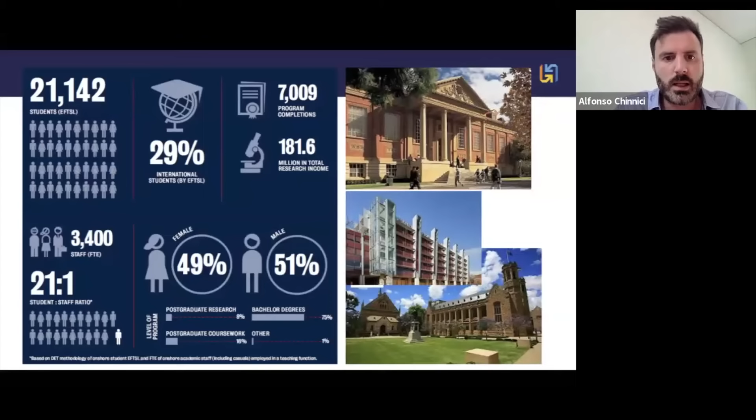Adelaide is the capital city of South Australia. For those who have never come, I really invite you to visit our city. It's quite beautiful, as I would say, being Italian, with a Mediterranean kind of climate, very similar to Napoli, and it's the fourth largest city in Australia. Our university this year celebrates its 150 year anniversary, with close to 20,000 students per year from many countries - Southeast Asia, Europe, Australia, US - so from all around the globe. It's quite an international city and university.

Most of my work sits within the Center for Energy Technology, which we call CET. It's a very multidisciplinary center, focused on net zero industry and hydrogen. Most of our work starts from fundamentals but has a lot of application. In fact, we have an industry advisory board that we report to, and the center has evolved to become a major engine for powering different cooperative research centers in Australia.

Today I'll talk a little more in detail about the HILT CRC. As you can see from our KPIs, besides traditional academic KPIs, we have many industry-type KPIs, particularly in the commercial technology platform. We just hosted, finishing yesterday, a major industrial high temperature forum which we host every 2 years - I invite you to come to High Temp 5 in 2026. In alternating years, we have a conference on hydrogen production, called HIPT, which has grown to about 300 attendees, running in alternating years from High Temp. It will be next year in Adelaide.

I've been talking a little about HILT CRC, which stands for Heavy Industry Low Carbon Transition, and CRC in Australia stands for Cooperative Research Centre. In the history of CRCs, HILT is one of the largest in terms of both number of partners and direct cash funding. It's a 10 year program, roughly a 240 million Australian dollar program, and it's industry managed.

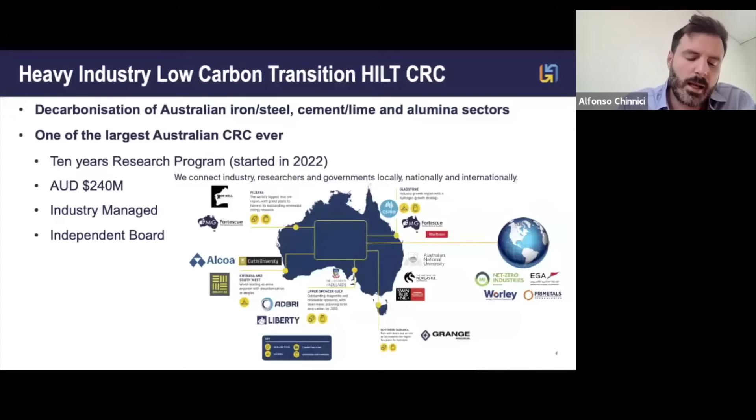We have a strong connection with European research centers and universities, such as University of Naples, but also DLR in Germany, and up to the US with Arizona State University. So it's quite a global center in that regard.

Now, I've decided to give you a snapshot of the work on industrial decarbonization only. Of course, we operate at 360 degrees—we look at decarbonization, transport, aviation fuel, and so on. But for today, I'll just focus on the hard-to-abate sector.

The reason why the center is very focused on decarbonizing heavy industry, you could probably get a flavor of why from these IEA plots. It basically tells you that while the world is decarbonizing, and doing a pretty decent job in sectors such as electricity, building, or transport, the industry—particularly high temperature industrial processes—is much harder to decarbonize. As decarbonization goes along over the years, the share of CO2 equivalent allocated to industry gradually grows, to a point that by 2050 the IEA is basically telling us that the majority of the share will only come from heavy industry.

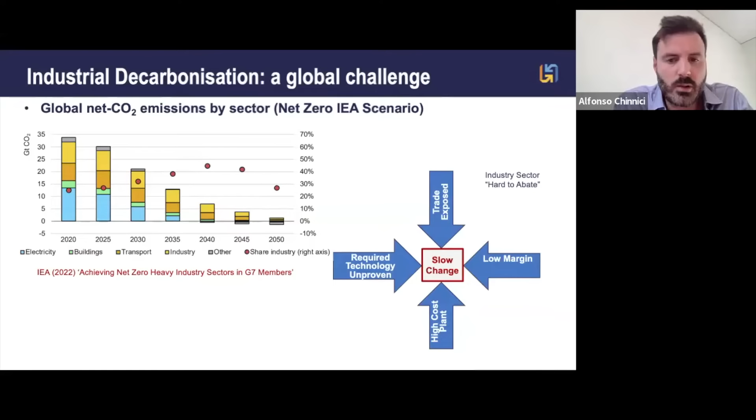Now, of course, this is a challenge, but on the other hand, if you think about the cost of decarbonizing some big commodities like steel or cement or plastic, with current existing established greener pathways, cost is a problem—a major concern from the commodity aspect. You see that we are looking at up to 20, 100, or even 50% increase on these three commodity prices.

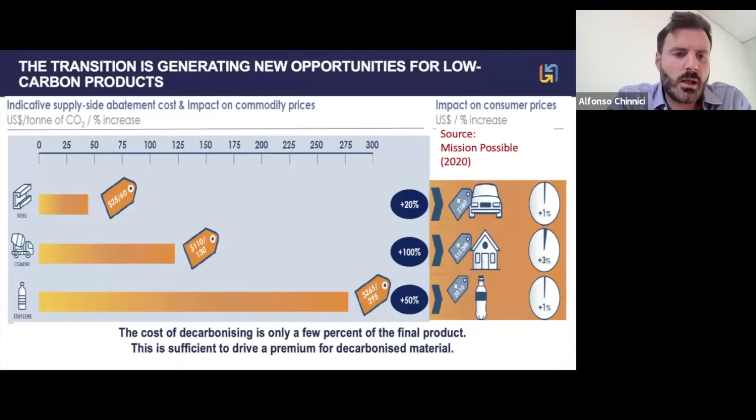But when it comes to the end product—imagine a car or a house or a plastic bottle—the actual potential impact on the final price is quite minor. Minor to a point that it's sufficiently small enough to potentially drive a premium for production of decarbonized materials. Many early players started to invest in green products just because of the potential impact of utilizing a green premium or other policy mechanisms to fast-track the transition. So this kind of justifies further investment, from very fundamental R&D up to actual commercial transition.

Now, in terms of additional challenges to high temperature processes for heavy industry, I believe most of you are familiar with this—I've just listed some key appliances in iron, steel, cement, and alumina. These are all reactors, high temperature, typically above 1,000 degrees for blast furnaces; we're also talking about 1,600 Celsius. The reactor scale is high too—on average we're looking at 100 megawatts.

Now, one of the challenges with current appliances—imagine a blast furnace—is that the lifetime of this reactor technology is around 20 to 30 years. This brings a real urgency to decarbonize and upscale the new emerging pathways to decarbonize this technology.

The reason being, for example, if today we decide to rely on a blast furnace rather than switching to, for example, a DRI process, this will lock in the blast furnace utilization for that particular process for at least another 20 years, given that this is a very high capital intensive relining process. So if we do not provide an alternative to blast furnaces or other types of appliances, we are looking at locking in for another cycle or lifetime.

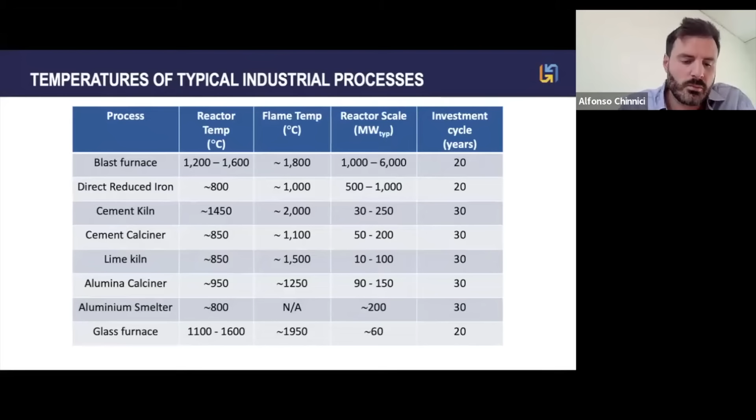So we are really pushing out the target that we have for net zero by 2050. Of course, there are many alternative pathways to net zero for this industry. Combustion and hydrogen and derivatives can, in my view, play a key role. Of course, there are other competitors, but also complementary pathways such as electrification or even using solar thermal high temperature processes.

To some extent, particularly for cement, where CO2 comes from limestone, it will make sense to use carbon capture, and depending on availability, biomass can also play a role. Of course, all of these pathways have different stages of development in terms of TRL, and different opportunities and challenges, but one common factor is relatively high cost.

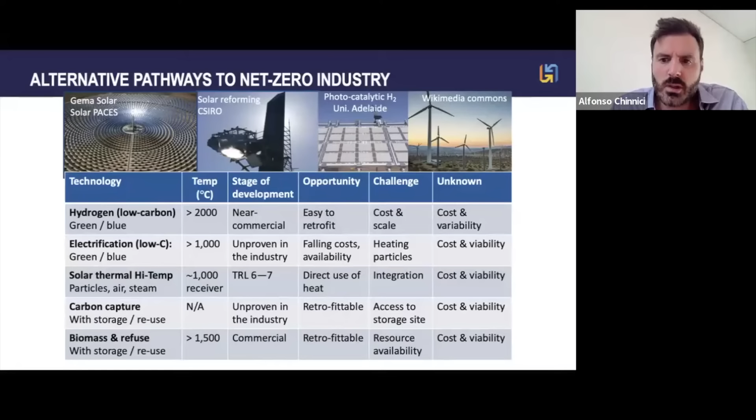For example, hydrogen, especially green electrolytic hydrogen, is still costly today for some of our partners to really say, yes, let's make a switch to hydrogen today.

Now, when it comes to net zero, another thing we really invest in at the center is around circularity. In order to really tackle the challenge of decarbonizing heavy industry, we can't think of our process in isolation. This is just a layout of circularity coming from the three major commodities that we have in HILT.

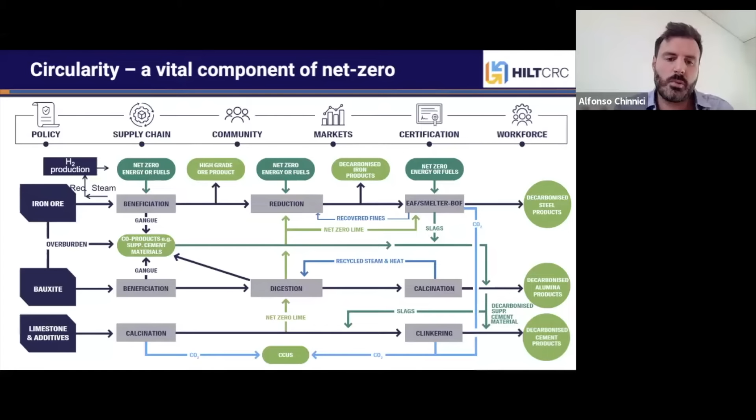Just to give you an idea, lime is a cross commodity, used for many processes in the iron ore sector but also in the bauxite alumina sector. So decarbonizing one will also unlock a transformational opportunity for these other sectors. Circularity will play a major role beyond just the technical combustion challenge or opportunity, in order to really tackle the problem of net zero heavy industry.

Now, as I say, we are very active in the hydrogen technology aspect, across all the supply chain, from production, techno-economics of storage and transport, down to the utilization aspect. Today I will try to focus a little bit more on the combustion aspect, given that this is a combustion lecture.

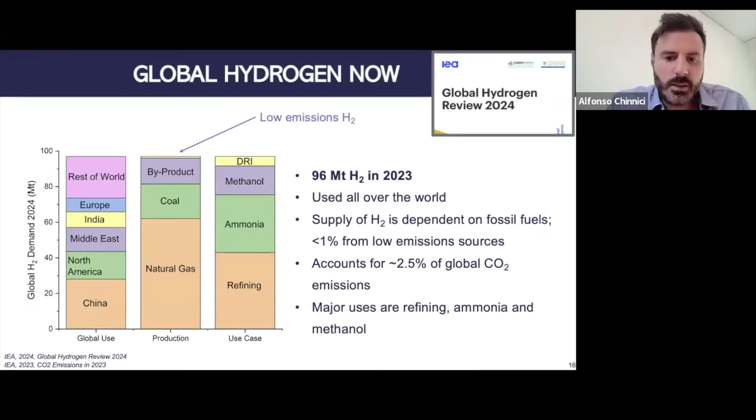But just to set the framework here, if you look at the IEA trend for low emission or low carbon hydrogen, we produced roughly 100 million tons of hydrogen last year, but less than 1% comes from low emission sources. On the other hand, given that the majority of hydrogen comes from oil and gas refining, this is actually a dirty process at the moment, accounting for close to 3% of global CO2 emissions.

Now, when it comes to the IEA pathway to reach net zero, the NZE scenario, we are really far away from where we should be, in the sense that currently we only produce 1 million tons per year globally of this low emission hydrogen. What we really should produce is close to 50 million tons per year by not even 6 years from now. So it's really a challenging task, and this gets even higher, close to 65 million tons per year, when you look at 2030.

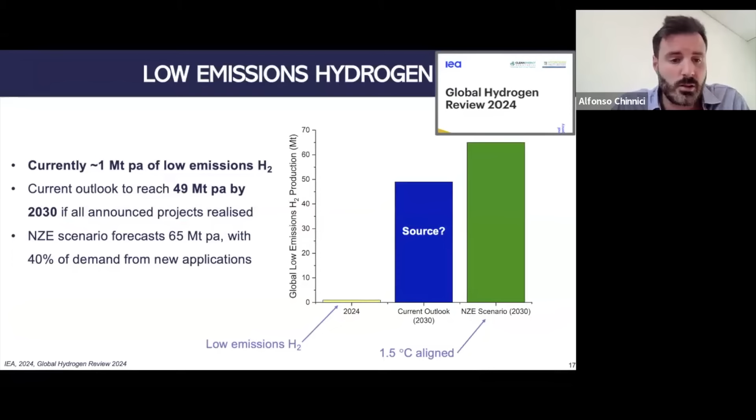So there are different sources, different technologies being proposed. Of course, the electrolyzer is the key predominant one around the world, but currently it's not being scaled up fast enough, and that's mostly because of the high levelized cost of electricity today for many countries around the world.

Now, at the University of Adelaide, within our center, we are pretty focused on three different alternative production routes beside the electrolyzer. Of course, we do quite a lot of work in electrolyzers, but we are also focused on alternative pathways. One is what we call the ultra green photocatalysis route, which some of my colleagues in the chemistry department have really done a great job fast tracking in the last couple of years, up to TRL 5, and they've been backed by many investors.

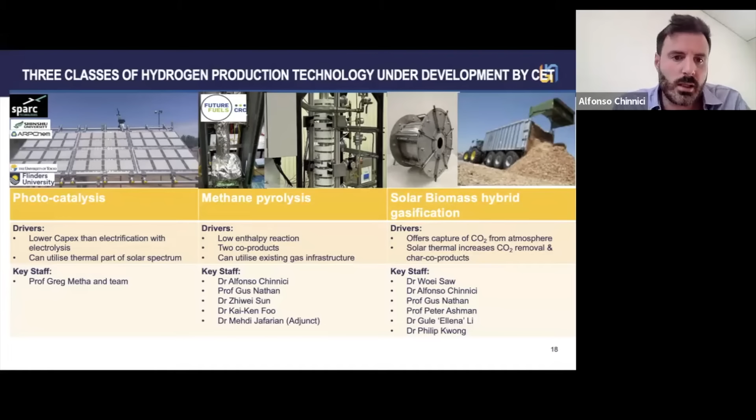While my group has been focused more on the thermochemistry side, so we are quite interested in looking at methane or biogas pyrolysis, as well as using alternative sources such as solar thermal energy to process biomass to produce green syngas. Given the short time today, I would just give you some highlights on why we are interested in methane pyrolysis.

Now, when you look at the basic thermodynamics of pyrolysis and compare that with established electrolysis routes, it makes a lot of sense from a delta H perspective, because it's a quarter of the energy requirement compared to electrolyzers. And also, you don't need water, which is another key constraint in many countries around the world for electrolyzers.

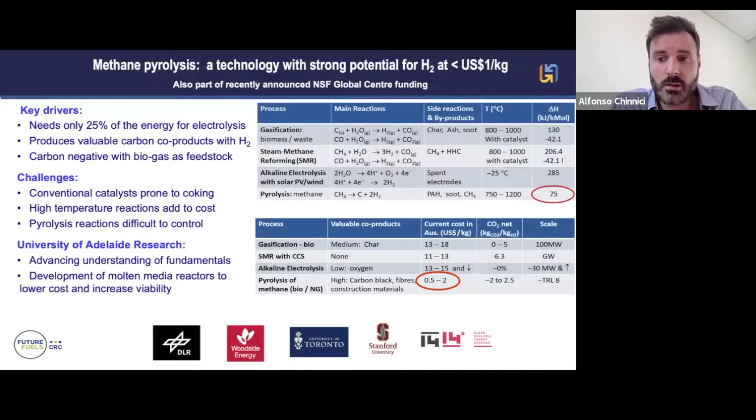And also our estimates for current production costs in Australia, but we have many partners around the world that back up this trend, for example in the US, putting this technology at potentially less than $1 per kg of hydrogen with current established production technology.

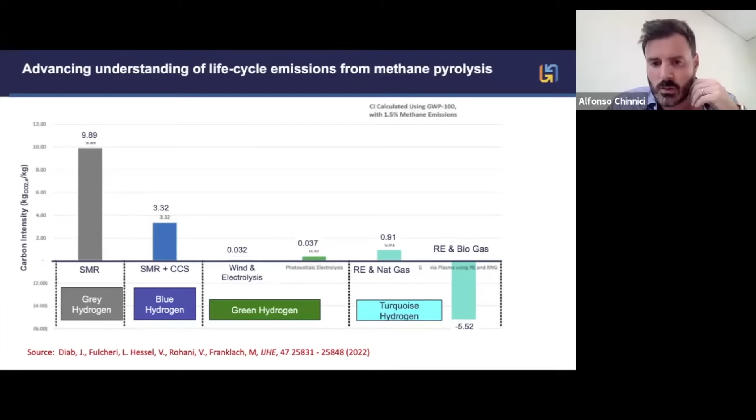Another key interesting point around what we call turquoise hydrogen is that the electricity or energy source that goes into the reactor to split the methane or biogas, and the source of the methane, is really critical for the CO2 equivalent estimates. In terms of carbon intensity, we could potentially produce turquoise hydrogen with negative emissions if coupled with renewable electricity and biogas, or very minimal carbon intensity if we use current natural gas, and this is after including fugitive emissions from natural gas operations. So especially in countries like Australia, where gas is quite cheap and available, it could make a lot of sense.

Now, we are not trying to reinvent the wheel. There are many companies we collaborate with around the world that have already achieved quite advanced stages, the most advanced being Monolith in the US, which has already reached commercial stage. They use a thermal plasma as their reactor technology. There are a couple of other technology providers, one being Australian, that instead use a fluidized bed catalyst and also microwave.

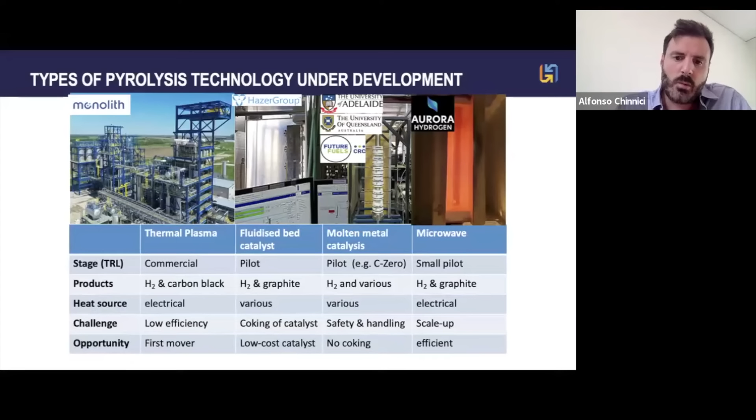We started using tin, but there are also other types of metals that can be utilized. We bubble gas such as methane or biogas into our bubbling column, and we use resistive heating to produce the heat and split the methane or natural gas at moderate temperature. Basically the carbon floats at the top, while we can recover the unreacted methane or the hydrogen product also from the top.

This has a lot of potential advantages because we don't have what we call a sacrificial catalyst. Also, we can take advantage of high heat and mass transfer coming from bubble reactors, and we can tune the residence time of this device to tailor the particular carbon product, which also has a strong impact on the techno-economics.

We have done quite a lot of work and modeling of this device, and from a chemical engineering perspective we have identified that how we produce the bubble is quite critical. Ideally we would like to produce micro bubbles in order to maximize surface area, because the reaction is mostly dominated at the interface. Through the use of Aspen process modeling, we looked at different configurations and were able to identify conditions where we can obtain high conversion of the methane at relatively low temperature, less than 1000 degrees, which is a step change compared to some of the other processes I showed before.

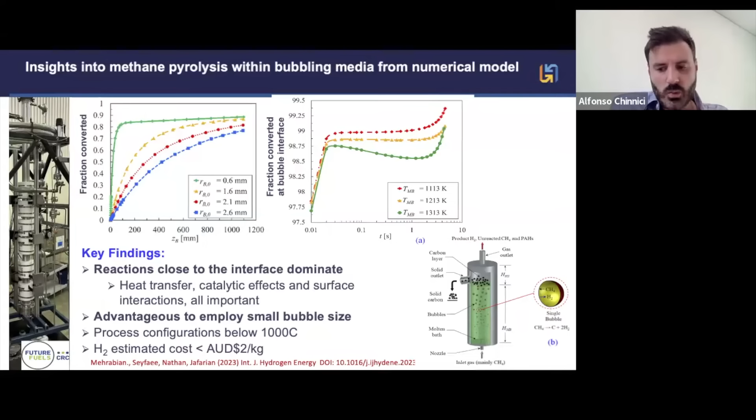In terms of cost estimate, we could potentially reach less than $2 Australian dollars per kg, which roughly equates to $1 US per kg. So we are further investing in this technology with our partners, but we welcome any collaboration from other research groups around the world on this topic, particularly on the kinetic aspect, which is non-trivial.

Now, of course, if we have availability of hydrogen at relatively low cost, it makes a lot of sense to utilize hydrogen as a fuel or as a reductant to replace some traditional fossil fuels. When it comes to combustion, although hydrogen looks like a simple fuel compared to some traditional hydrocarbons, it brings some challenges.

Some are listed here: there is a chance of higher NOx than with traditional hydrocarbons, due to a higher adiabatic flame temperature. For processes requiring radiation, like rotary kilns in cement and lime production, this is a major problem because hydrogen has low radiant heat, much lower than hydrocarbons which produce soot and hence radiation. Also, hydrogen has a low visibility flame, which brings a safety aspect into the mix.

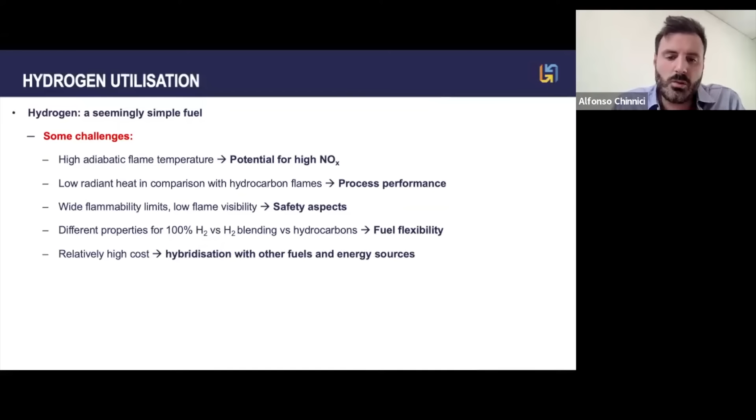If you're looking from a blending perspective, this requires technology that can provide fuel flexibility. And back to my initial point around high cost, we should also start looking at alternative combustion technology, ideally hybrid combustion technology, where we use hydrogen only when it's cheap enough or when there is available stored hydrogen from, let's say, a renewable grid that gets stored and is cheap enough to be used, while in other cases we use more traditional energy source.

So in terms of the more fundamental aspect of hydrogen, I'll try to go quick through this since most of you are familiar. Of course, we are interested in hydrogen given that it does not produce CO2 when it burns. But when you look, for example, against methane, the chemical and physical properties are quite different. A key one is the energy density of hydrogen.

Particularly on a volume basis, hydrogen is a third less energy dense than methane. This is a major problem, because imagine you want to push through your burner the exact same amount of heat — this means three times more volume flow of hydrogen compared to gas to keep the same heat. So you can imagine the challenge in terms of flow rate, velocity, and how we readjust process performance.

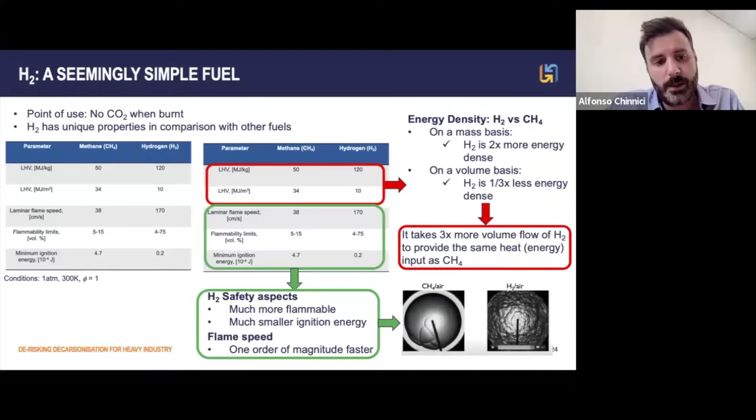And of course, when it comes to laminar flame speed, which is a critical parameter for safety but also critical for how we design our burners today, we know that hydrogen's laminar flame speed is an order of magnitude higher, as you can see from this video, compared to methane. This really requires reconsideration of many current burners, and also brings challenges when you look at retrofitting existing appliances, which ideally would be the first stop for our partners when it comes to low-risk changes.

Now, another interesting plot I always like to spend a few words on is around blending of hydrogen with methane. If you look at the last 5 years, especially at the fundamental level, there are hundreds and hundreds of papers around blending. Is this the right way to decarbonize or to reach net zero? The short answer is no.

If you look from a combustion aspect only, this plot shows on the x-axis the blend of hydrogen and methane by volume, and on the y-axis the actual CO2 reduction. Because hydrogen is a third less energy dense than methane, you need to reach at least 80% by volume of hydrogen to only have half of the energy input coming from the blend. So in other words, when we look at blending for net zero, we should only look at the extreme sides of this plot, 80% and above, which means it's probably best for us as a combustion community to focus on regenerative burners that cope with 100% hydrogen firing, rather than looking at the first step of blending.

Of course, there are other aspects of the supply chain where it does make sense to look at blending 5, 10, or 20% by volume of hydrogen, and this comes more from the gas producer and pipeline operator side, where ideally you can pump a little hydrogen into the natural gas, not really to decarbonize in my view, but rather to produce momentum in the supply chain in terms of investing in upscaling infrastructure, and also to really understand the whole hydrogen market better. But from a very simple combustion perspective, it doesn't make much sense to look at low hydrogen blending for net zero.

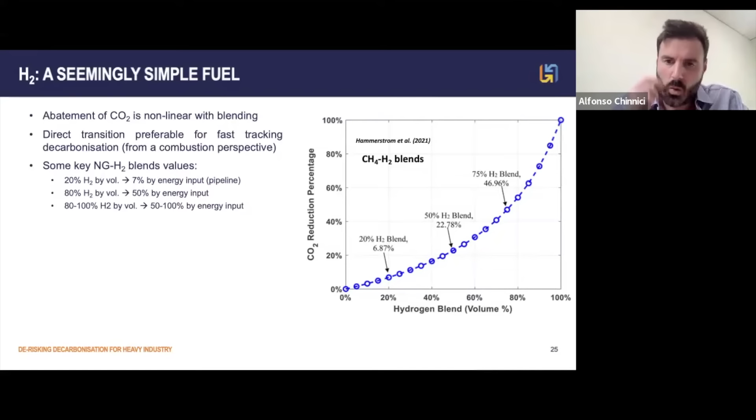Now, to this extent, in our group we are pretty much working hand in hand with many end users. And again, we are lucky enough that our end users are very kind to provide plant data and work hand in hand with our students to really try to tackle this big challenge for their appliances.

And particularly with the partner, we are looking at how we can decarbonize with hydrogen — hot gas generators for, I don't know, pelletization, rotary kiln for cement lime, but also reheating steel. All of these appliances have some common challenges, for example NOx, but others, for example kilns, most specifically around the radiation profile and radiation fraction, which is challenging with hydrogen. And for reheating steel, you have additional challenges or constraints where you also need to identify combustion technology that can provide quite uniform heating and absence of hotspots, to avoid reducing the performance of the rolling and the quality of your steel.

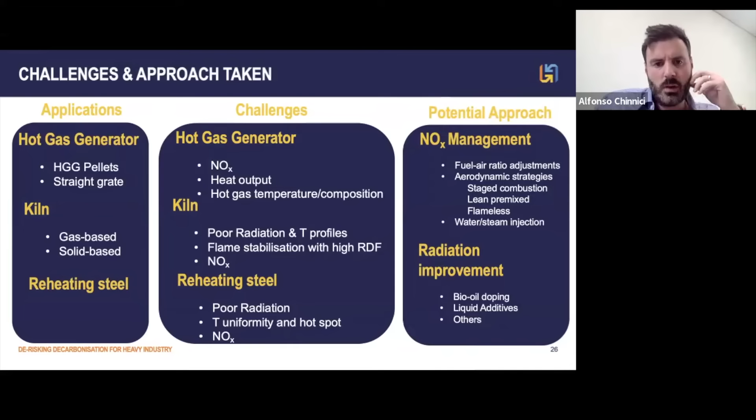On the right side of this slide, you can see some of the ideas or technology we are working on with our partners around both NOx management and radiation improvement. Today I will give you some snapshots of key outcomes on that.

So just as a start, as an exemplar technology, we are working very closely with the largest pellets producer in the Oceania region. It's a magnetite, pelletized-based producer.

They use a quite unique way to produce pellets, and they have a series of hot gas generators that today are powered by full-on natural gas. They have a series of roughly 7-8 megawatt register type burners to produce the hot air or hot flue gas needed for the induration step down the track.

So we started first by looking at understanding what's the challenge or constraint of utilizing the existing burner when switched to natural gas with a high hydrogen intake in the blend, or ideally 100% hydrogen. We also looked at a series of strategies - do we need to optimize the mass airflow rate, or rather the equivalence ratio? This started initially as a trivial question, but as we show you shortly, it is not.

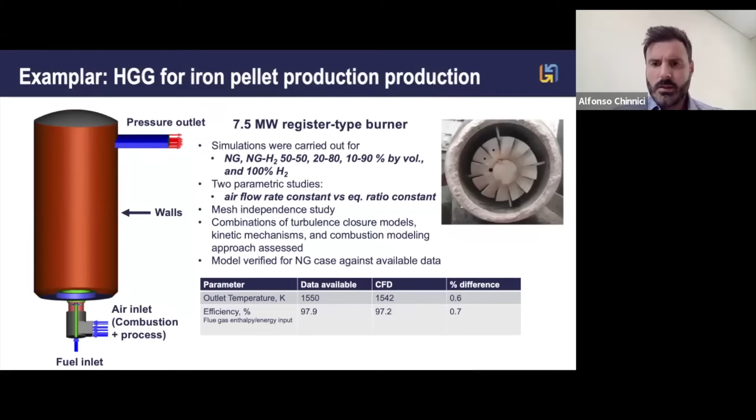So we have developed a 3D CFD model of their actual commercial plant and burner. We have verified the model through some of our existing pilot plant data that has been provided. Of course, we have done a more in-depth verification of our model training using a lab scale data set that we have in-house.

Just to give you a flavor of some of the results, you see on the left side some of the temperature contours and the OH profile within this hot gas generator when we gradually switch from gas to hydrogen, and also what's the impact of the hydrogen intake on components of the burner. You see that initially this flame, what we call flower-like type, is relatively short compared to the volume of the hot gas generator.

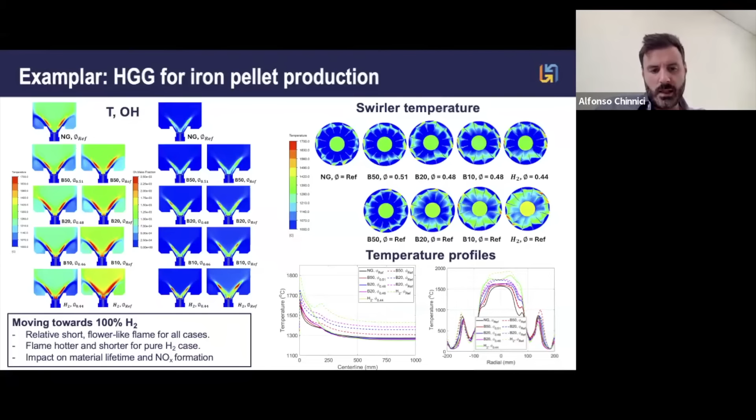The flame dynamics stays somehow the same when you move to really high intake of hydrogen, including 100% hydrogen. But you see that when you gradually increase the hydrogen, you start having a flame that is much shorter and much hotter, which, as you can see from the temperature here, has a strong impact both on material lifetime and, as I'll show you shortly, on NOx formation as well.

Now, as I said before, you can imagine that much hotter flame means much hotter NOx, much higher NOx emission. There's two aspects here. Firstly, one thing I'd like to draw your attention to is how policy everywhere in the EU, US, and also Australia really works against hydrogen utilization today.

Today we are bound to report commercially NOx level as milligram per cubic meter of NOx at dry condition, typically normalized at some oxygen level. But this is not really the right thing to do when you start having hydrogen in the mix, because you actually in a biased way bring the limits for hydrogen lower. So actually the right thing to do would be to report this as ENOx, as milligram per megajoule.

A few policy mechanisms have been put in place in Australia to change the standards today. This has already been put in place for Type A appliances, and the Type B new policy mechanism on how we report NOx when hydrogen is in the mix will be coming in the next few years in Australia.

But back to what actually happened in our hot gas generator - you see that keeping the total mass airflow rate constant does help in keeping the NOx low enough even for really high hydrogen intake, while readjusting the equivalence ratio every time we change the fuel has a strong impact on NOx. The bottom line of this exercise is that the current burner does not cope well with 100% hydrogen firing - it has really high NOx emission, much higher than existing operation, and really high compared to current limits.

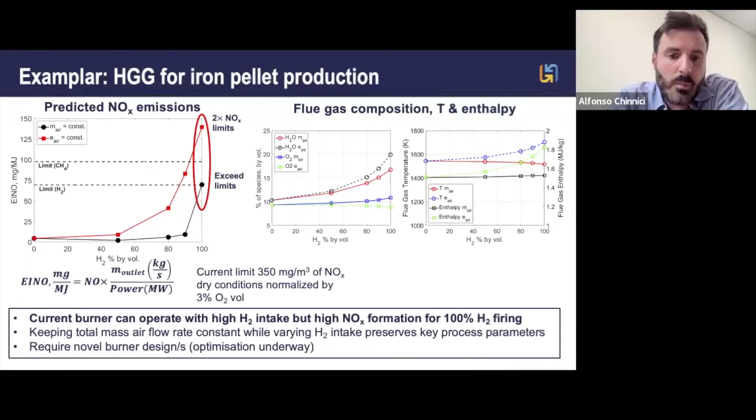This is non-trivial, but again we have identified that maintaining the mass flow rate constant in our hot gas generator while changing the fuel really does help in preserving both the flue gas temperature and the flue gas enthalpy similar to current gas operation, so that we anticipate only a minor impact on the downstream induration process. But of course we do need to re-engineer the burner, and we are doing that quite substantially.

Unfortunately, I'm not able to show you the actual details of how we do it, because of IP commercialization. But just to give you a flavor, we have tried to basically design an ultra low NOx burner suitable for hot gas generators with 100% hydrogen firing, with the least change to current operation, and also with the ability to switch between current burner design and the improved burner design for hydrogen whenever hydrogen is available.

You see that our prediction in terms of NOx emission brings the burner, even with 100% hydrogen firing, quite low, close to existing operation. So this has really sparked a lot of momentum from our investor here in terms of moving to a next step of pilot scale testing of this new burner, and hopefully prove the concept at megawatt scale.

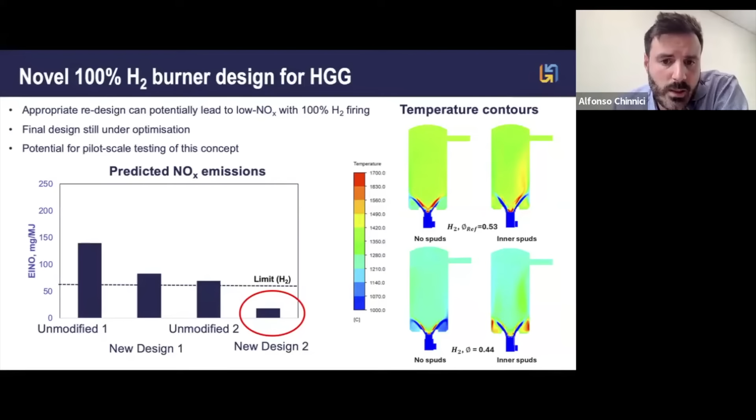Now, of course, as you know from our group, we are very strong with fundamental combustion and laser diagnostics. We believe this is always key to unlock technology developments and further de-risking. So we are working very closely with a key leader in combustion supply development to really identify new mechanisms to bring NOx down when we operate with 100% hydrogen.

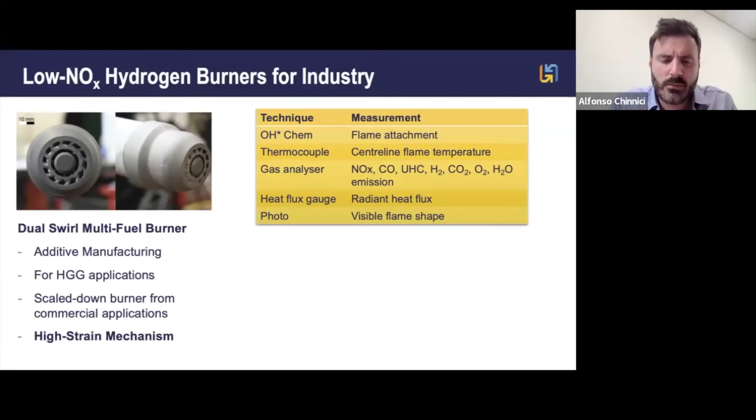So we have done a quite detailed campaign using, I would say, basic characterization of flames from OH star, thermocouple gas analysis, heat flux, and photo. And we are now also moving on to more detailed laser diagnostic assessment.

So you see that when you move from a relatively low strain to a high strain, the flame gradually moves from a V shape to an M shape. And the M shape is what we are interested in, being, as I will show you shortly, a very low NOx mechanism.

From a very fundamental point of view, there has been quite a lot of research around M-shape. But what I would say is this is the very first time that this kind of regime has been identified in an open flame. Until now, M-shape was mostly identified in confined flames, and the flame mechanics behind the establishment and anchoring of this M shape were mostly coupled with the presence of a confinement.

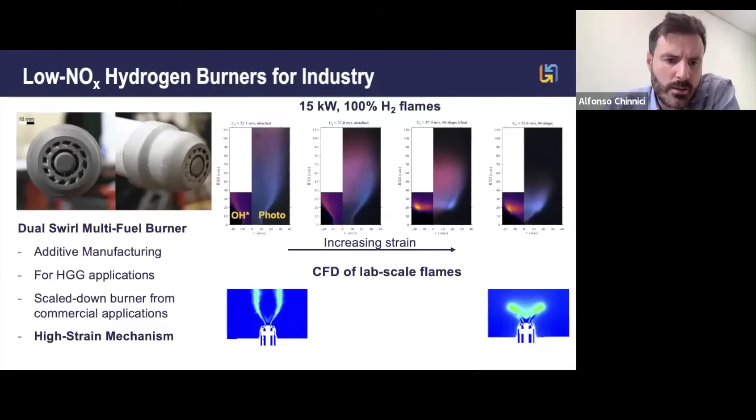So we kind of believe this is a new mechanism, and we're also utilizing advanced CFD of this lab scale flame, not just for improving our data set for verification of the model at industrial level, but also to really dig down into the mechanism behind these high strain 100% hydrogen flames.

When it comes to operating the burner with natural gas, it's quite relatively low NOx. While we need to adjust the strain in the burner to bring it to operate in a low NOx regime via an M-shape formation.

Again, this is kind of a work in progress, but it's giving us a lot of insight on how we can bring new low NOx mechanisms to reality with our combustion partner.

At the moment, we are basically manufacturing a series of these burners by changing some parameters in the geometry, firstly to extend the data set, but also ideally to isolate the effect of strain from other factors, particularly the momentum ratio between the two channels.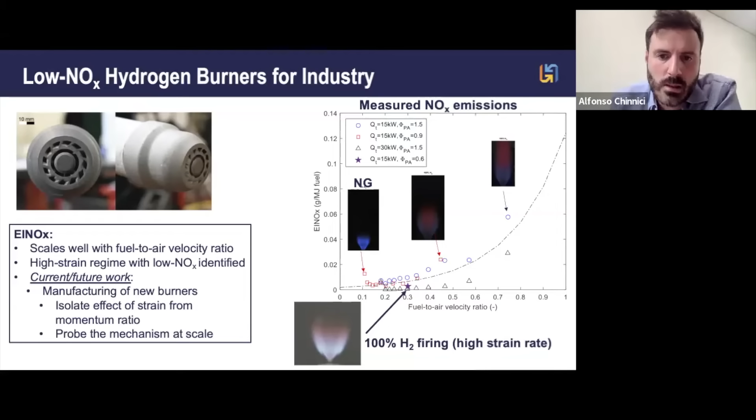And if that's successful, the next step would be to probe the mechanism at scale. So we are thinking about 0.5 megawatt to 1 megawatt kind of pilot scale testing to see if this mechanism still holds at large scale.

Now, we are also very active in the second challenge, which is the radiation challenge around hydrogen. As I said before, and as you probably know, hydrogen has very low visibility and a very low radiation fraction.

So when it comes to an appliance such as rotary kiln, this is a key problem because the main heat transfer mechanism in a rotary kiln is radiation. And it's not just the radiation, it's the radiation profile that has a strong impact on the final quality of our clinker or our quicklime.

So as of today, bringing 100% hydrogen into a rotary kiln is almost impossible, very challenging, unless we start identifying a way to really change how the radiation coming from hydrogen flames behaves in a kiln. So we have identified two kinds of mechanisms that could potentially solve or assist with this challenge.

Firstly is in the use of bio-oil doping, and here is a published work from one of my former students, Adam, 2 years ago. His PhD was more around doping bio-oil in a pure hydrogen flame.

On the left side of this photo is reddish 100% hydrogen flames. Moving gradually to the right, here you see adding 1, 2, up to 5% by volume of bio-oil. You see that we can basically bring the radiation back to how a pure natural gas flame was, actually even higher if we need to.

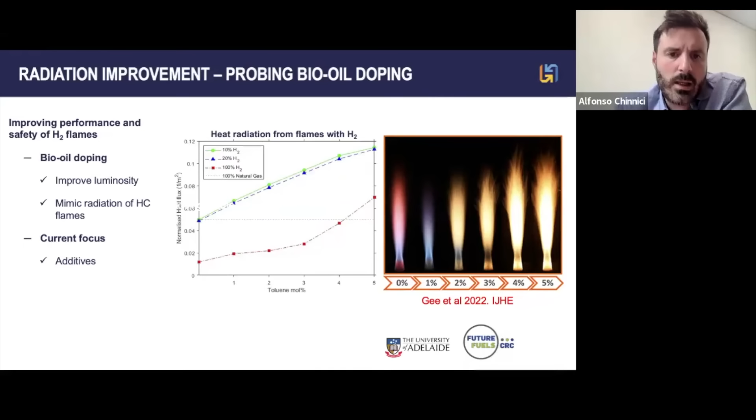Our current focus is still along the side of doping, but we started looking more around using liquid additives or also particle additives. Today I can show you some work in progress around using hydrogen peroxide as an alternative way to dope hydrogen flames.

For those not very familiar with peroxide, we use it today and it's readily available in pharmacies. If we have a cut, we can use peroxide for that. But hydrogen peroxide always comes together with water, and depending on the concentration of peroxide in water, we can go from pharmaceutical grade peroxide to bleaching. We use it a lot for laser cleaning, and up to a monopropellant for space shuttle rockets.

The reason being is that peroxide goes from liquid to gas phase around 150 degrees Celsius, but at 450 degrees Celsius under atmospheric pressure it releases a lot of heat. It's a very exothermic reaction, and can be seen as an alternative way to produce oxy-steam. From the reaction, it doesn't go back to hydrogen, but rather to oxygen and water, so it can be an alternative way to replace air separation units.

It's also an alternative way to ideally achieve dilute conditions close to, for example, MILD combustion, which will mitigate NOx while also improving radiation. We've done an early experiment in this area, doping different grades of peroxide into 100% hydrogen in a quite small needle jet burner, which gives us well-confined and well-defined boundary conditions that are also important for our CFD modeling.

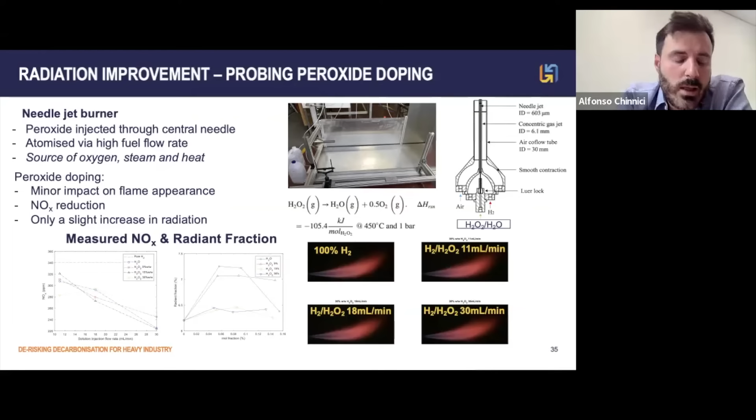We believe there could be a strong opportunity here, also in the overall picture of the supply chain for hydrogen, given that peroxide is a derivative of hydrogen.

Now, in terms of tackling other aspects of the cost of hydrogen, it makes a lot of sense to use hydrogen only when it's cheap enough and when there is enough availability to the end user. So a few years back, we started a program around identifying novel combustion technology, particularly what we call hybrid combustion technology.

In short, these are new furnaces or combustors that have the ability to operate both as a traditional combustor, but also to bring in intake of alternative energy sources. One focus of that program was around whether we can couple a flame together with concentrated solar energy into the same device—basically one unit bringing in multiple energy sources simultaneously.

This has strong advantages. From one end, we're able to stabilize the supply of intermittent renewable energy sources such as solar energy. From the other, it also brings a lot of technical benefit: when we switch between energy sources, the device is hot enough that we don't have transient issues or much shorter startup/shutdown time, and we also gain the ability to use hydrogen or other alternative fuel only when there's enough and when it's cheap enough.

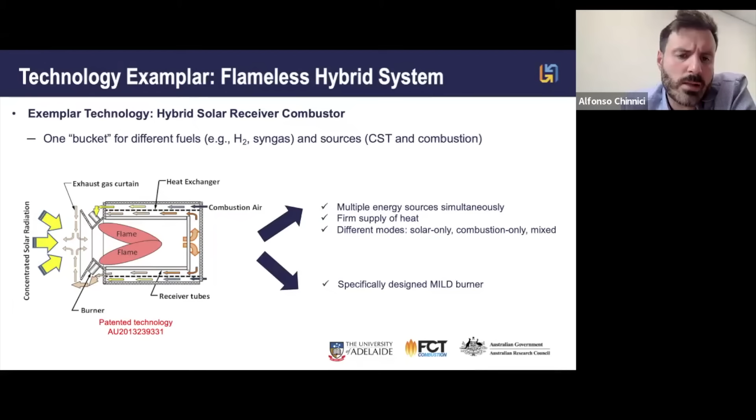This technology had a lot of media attention a couple of years ago, particularly from the IEA SolarPACES magazine, and not just the community. It has brought a lot of scientific paper to our group, but also a lot of new knowledge and insight for the combustion community for the first time on how a combustion environment copes or behaves when you have a very different source.

Solar thermal is basically radiation and typically has an order of magnitude higher flux. On average, a combustion device gives you maybe 0.3 to half a megawatt per square meter. When we look at CST, we are easily talking about 3 megawatts per square meter at the peak.

In terms of technicality, there were a few challenges there that we were able to address through appropriate investment in the CFD and the aerodynamics of the 30 kilowatt lab scale device. In addition to really maximizing the recirculation ratio within the reactor, which is key to establishing mild combustion, we also needed to make sure that we had a positive pressure on the aperture.

The reason being, this device actually has an opening, and I will show you shortly the device in operation. An opening because we do need a hole or aperture to shine or collect the solar radiation. This is a very complex problem because we basically have a combustor at 1200 Celsius, and suddenly you have a hole in it, and you can imagine you don't want your hot gas coming out. So the aerodynamic aspect was quite critical.

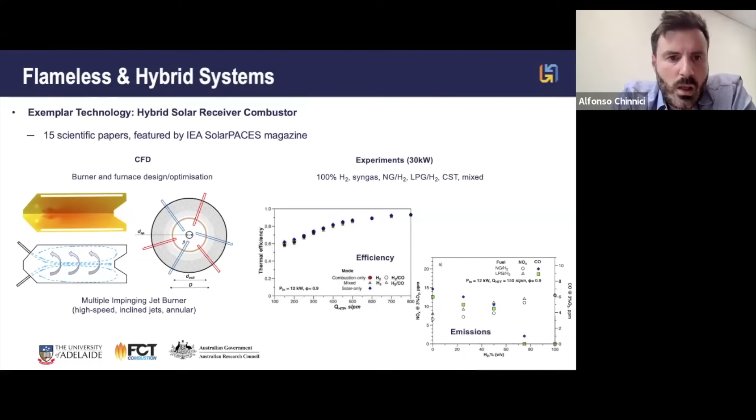This has shown that we can deliver similar performance, and also we can operate this with pure hydrogen and also with syngas, from very low grade to high grade syngas, without having much penalty on the efficiency. Mild combustion also takes care of having, you know, single digit NOx. So this was quite successful for our group.

Just to give you an idea of what I'm talking about, here is a snapshot of our furnace that was operating with pure hydrogen at 1200 Celsius. You see that the aperture is right in the middle, so there is no window there. You can actually put your hand inside, and we were crazy enough to take a couple of photos very close to the burner, but we really believe in our CFD model. In fact, it was cold in the sense that we were able to have some cold entry of ambient air rather than having hot gas coming out.

And here you see one of our solar simulators. This is kind of an old one that we use that was going to be aligned to the aperture in order to start the mixed mode of operation.

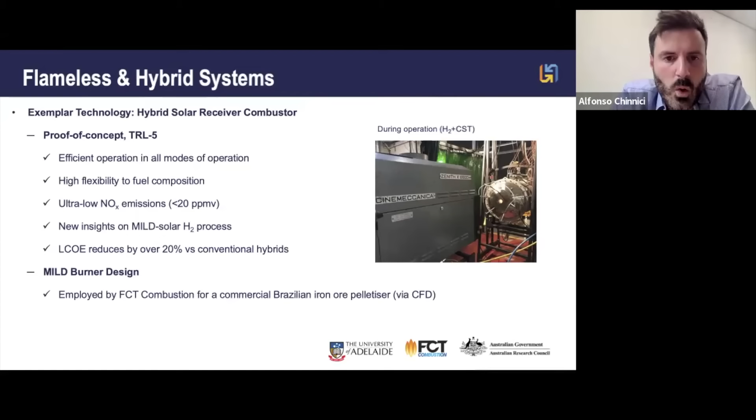In terms of where we are in technology development, the TRL that we reached in 3 years of the program was roughly TRL 5. We provided a lot of new insight on mild solar hydrogen and syngas processes, but also more importantly, the design for the mild furnace was then spun off into another study for a commercial Brazilian iron ore pelletizer through CFD, given that there was strong fuel flexibility and low NOx performance from that work.

Now, our group through HILT is quite focused at the moment on decarbonizing iron and steel. The reason being, for those that are not familiar with the iron and steel supply chain around the world, I always like to set the scene by showing this slide. When you think about the metals that we mine today, roughly we mine 3.5 billion tons of material every year. 95% of this is iron ore. So you can think about lithium, aluminium, copper, whatever - that's only 5% of what we mine today. 95% is iron ore.

And by far, Australia is the biggest producer today. We produce almost 1 billion tons. We export 1 billion tons of iron ore to countries such as China, Korea, India, EU, and Japan.

So if you look at the steel that is in your house and office, on average there is a 1 in 2 chance that the steel comes from Australian iron ore. And while the scope 1 and 2 emissions of Australia are relatively small for iron ore, by far the biggest problem for us is the scope 3 emission, given that steel making makes up 7 to 9% of global CO2 equivalent emissions.

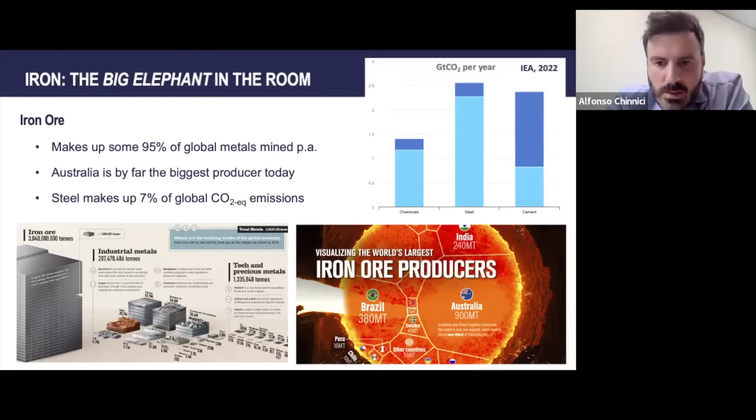So these are huge numbers, almost impossible to grasp if you've never visited a mine to see how big an iron ore producer's operation looks like. So of course, just starting from the scale, this is a big challenge.

But compared to other green metal pathways for iron and steel making, hydrogen is, I would say, the most prospective net zero reductant and fuel. That's become an established pathway for hydrogen. The reason being, it's a very good reductant as an intermediate for producing green steel from green iron without emitting carbon. If you're familiar with the iron and steel pathway, there are plenty of studies and pathways to produce green steel within the global net zero target. But most of them point to hydrogen, coupling green hydrogen DRI with an electric arc furnace. So hydrogen has a key role to play, of course.

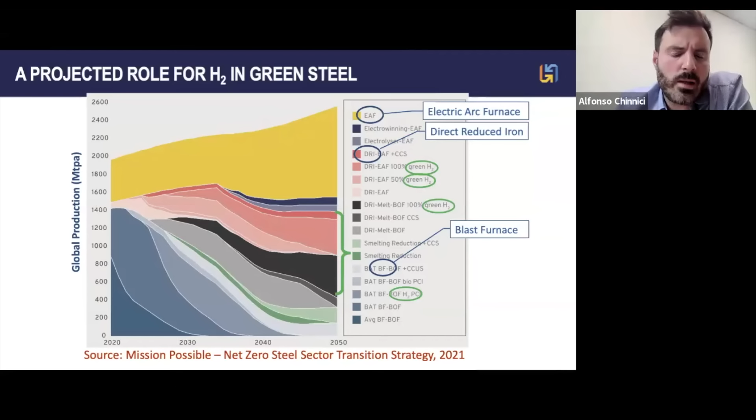Cost, availability, and supply chain are still a barrier for that.

Now, Australia is very strong in the upstream aspects in terms of mining iron ore, but people don't realize we're almost at a turning point. We have a big problem. We've been mining iron ore for many years, and while there are many emerging green energy technologies to produce green steel, these technologies require really high grades of iron ore, while the high-grade iron ore in Australia is depleting very, very fast.

So before we move into green tech for steel, we need new technology to clean up our iron ore and achieve a grade suitable as feedstock for a DRI-EAF kind of pathway or similar. In Australia this is called beneficiation, a loose term that basically covers all the processes for cleaning the minerals, concentrating it, and bringing it to the grade needed for further processing.

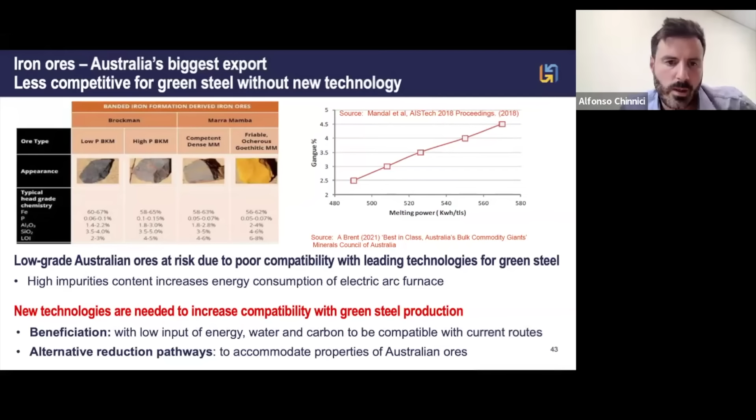Now, at the University of Adelaide, through HILT, we have patented a couple of technologies that could potentially solve the challenge of low-grade iron ore. This is all around providing high flux radiation. As you see from the slide, what we are suggesting is a thermal pretreatment done in a very smart way to concentrate and clean up some of this low-grade iron prior to downstream recovery using, for example, grinding or magnetic separation.

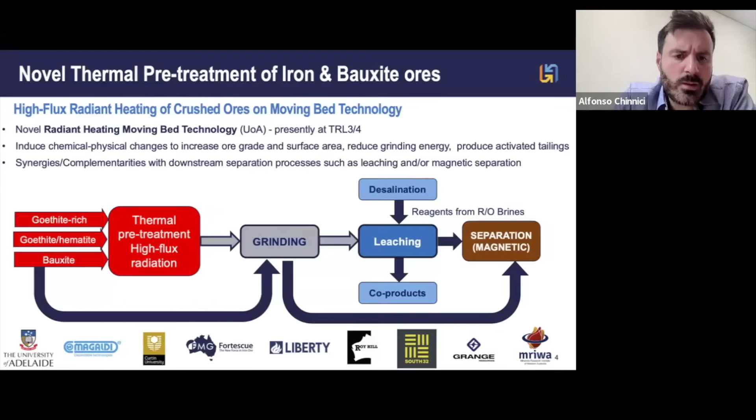In this context, we are working with our end user, particularly an Italian-based company that is actually a global leader in conveyor belts. It's called Magaldi. They also have a branch in the green thermal storage aspect. But for this particular program, we joined forces to design a novel conveyor belt that can operate with high flux radiation coming from bespoke hydrogen burners, but also concentrated solar thermal or resistive heating, and hybrids of those -- back to my previous slide around the need for hybridization.

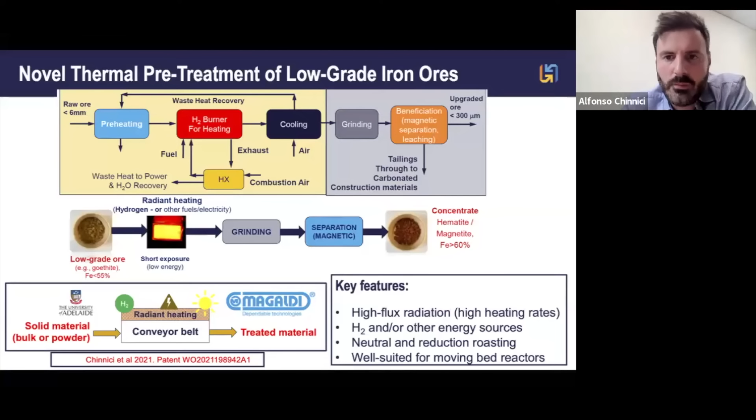The idea is to basically heat treat some of this low-grade iron in an engineered way, so we can induce chemical and physical changes to the material that make it more amenable to upgrading and also more amenable to downstream green steel making processes. So combustion is still key for some of these emerging pathways. Again, we're very lucky to work with many end users around the world that provide us different types of low-grade iron ore. I'm not going to detail the mineralogy today, but how the ore behaves really depends on the initial properties of that ore.

Here you see a snapshot of our bespoke premixed hydrogen high flux radiation burner. It's basically a surface combustion type burner that can provide high flux radiation. Typically these operate in the order of 0.3 megawatts per square meter at the surface, roughly 1,000 degrees, and heating rates between 10 to 200 Celsius per second.

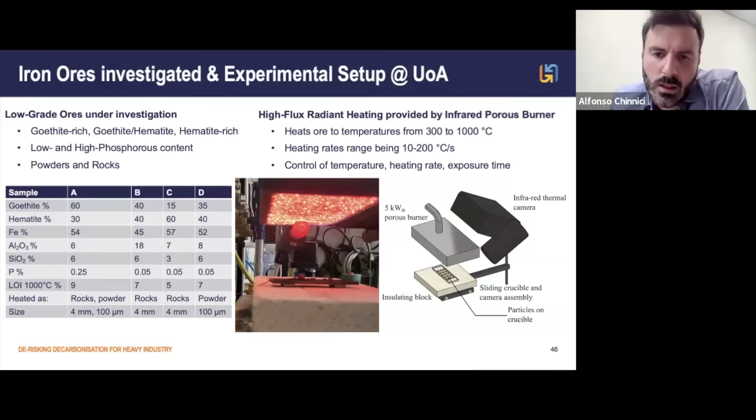We can adjust the heating rate or the temperature by basically adjusting the relative distance between the bed of material and the high flux radiant heating source.

Now I will probably go quick through some of these slides, but basically we first started looking in, can we use hydrogen or similar radiant heating source to induce big thermal stress to the rocks so that we soften up the ore so that we can much easier grind this ore.

Reason being is that grinding alone, and that's something I learned coming from Europe to Australia, I was really aware how much energy goes into a grinding or comminution circuit. Just to give you a number, 3% of the electricity produced today goes into grinding all around the world. So it's a huge number. So if we can even save a fraction of that, we're actually making a big impact.

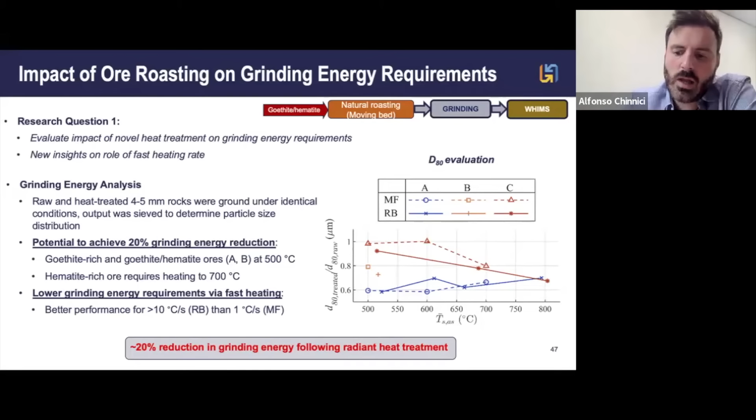So we were able to show to our partners on average that we can reduce the grinding energy following this novel hydrogen or radiant heat treatment, close to 20% reduction. So it's quite a large number. Of course, the mineralogy has an effect on the absolute value of reduction on the grinding energy.

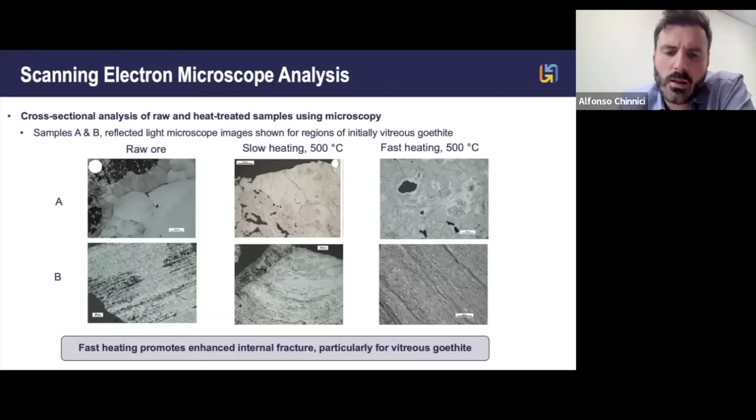And here you can see a snapshot of why this is happening. So you see this big thermal stress creating big cracking. And of course, we are also using calcination on some of the iron content, which helps bringing the steam out from this rock that basically promotes this cracking further.

When it comes to actual cleaning precondition of the ore, we're able to show that from a low-grade iron ore, which we can't sell today - anything less than 57% iron by mass has no economic value today - we were able to bring it to a 60-65% Fe concentrate, 62 being current market specs, 65 will go for a green premium, particularly for DRI.

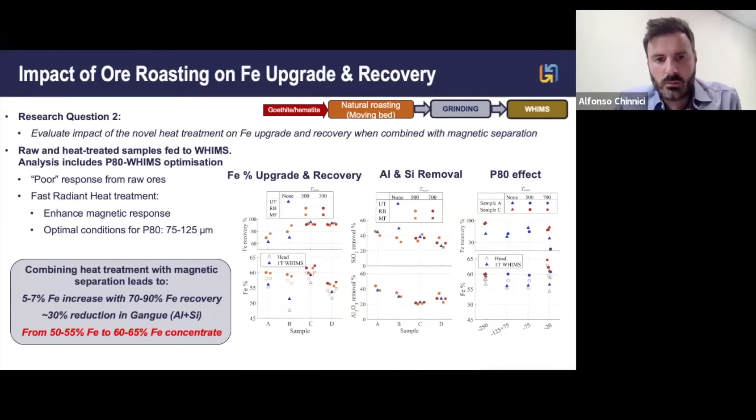So this has of course attracted a lot of attention by our partner investor, but globally has also an impact on the hydrogen supply chain with this novel technology.

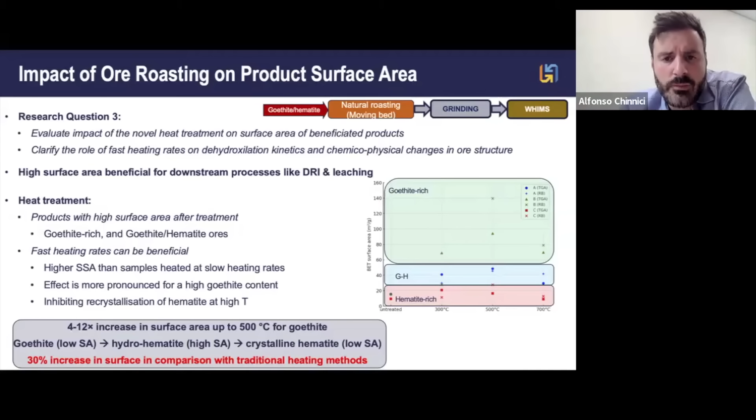At the more fundamental level, we were also able to show that if we use hydrogen and high flux radiation, we can really change the way how the ore responds to heat treatment. We can, on average, bring much higher surface area to the ore, which has a strong impact on downstream processes, such as for separation, but also in further reduction aspects prior to making green steel.

And also, again, at the fundamental level, and in my view, coming from a more traditional combustion community, this has also a strong impact for our combustion community. We are rethinking the way calcination regimes operate by simply changing the type of combustion that we utilize to calcine iron, but not just iron.

We have done similar work in magnesite, limestone, and different types of minerals. You see that basically flash heating using this high flux has a strong impact on the conversion, the time needed for conversion, and the temperature at which conversion happens. Plus it has a strong impact on the chemical and physical changes that we can basically induce in some of these powders.

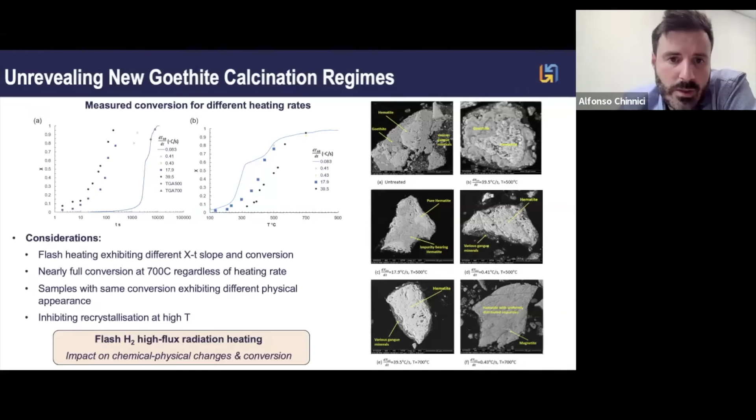So this has unlocked a lot of opportunity for really making a step change in the performance of this upstream technology. Of course, for our partner, at the end of the day, the dollar value is the dollar value. It doesn't make sense otherwise from that point of view.

So our group is also strong in bottom-up techno-economic estimates. Story short for these slides is that while, of course, hydrogen is still more expensive today than gas, on average the levelized cost of beneficiation plus loading this ore and the freight to China or Japan is in the order of $12 to $35 per ton, which is much, much lower than both current and future prices for iron. So there is still a healthy gap in terms of potential net profit for our iron ore producer, which basically unlocks further investment in technology, de-risking, upscaling, and demonstration down the track in our program.

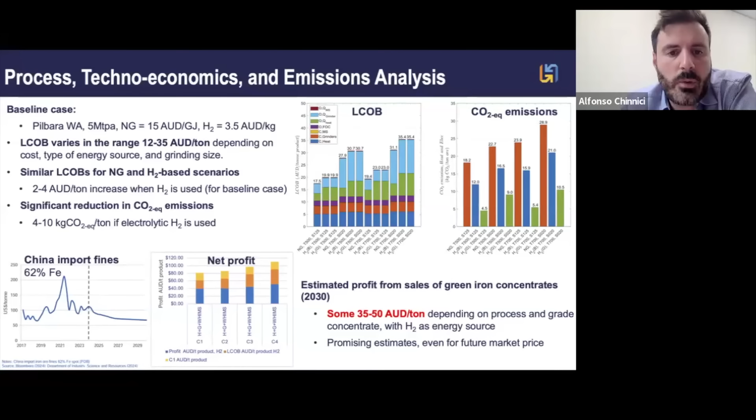As everything in research, things sometimes happen in a more serendipitous way. So our high flux radiation method, as I showed you before, was mostly thought as a preconditioning or cleaning method for mineral ores. But we started realizing that this can also be used for tailings from different industrial waste.

And that's not just for Australian waste, it's also applicable to many EU or US type of waste that require some sort of thermal pretreatment in order to be more prone to liberate key ions such as Fe, magnesium, calcium that can be utilized in alternative carbon capture utilization storage methods such as mineral carbonation, in order to permanently store in a benign solid form CO2 that can come from other direct air capture methods up to a flue gas or more concentrated CO2 stream.

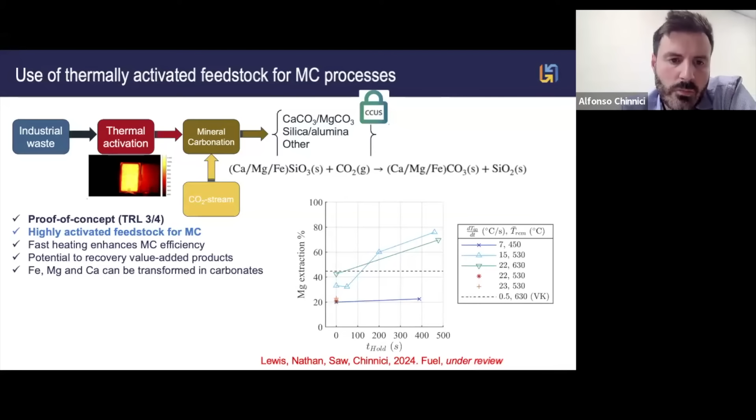We were able to preliminarily show, and we were very quick in patents and upscaling the theory of this, new activation methods of waste with basically the same methodology of how we do beneficiation with high flux radiation, high flux coming from hydrogen or other similar sources. On average, in a paper that will appear soon, we were able to improve the magnesium extraction from our industrial waste by almost a factor of 2 compared to established commercial rotary kiln for doing the same job in heat treatment of serpentine. This basically means almost doubling the carbonation capacity or carbonation potential of our waste, which has also unlocked quite a lot of attention from different potential partners for us.

Now, as I said at the beginning, we not only work with end users, but also with many technology developers. We work very closely with Calix. Calix is a global company that has a commercial magnesite plant in the US, but also has a strong presence at pre-commercial high TRL R&D level in Europe and Australia, towards utilizing an alternative calcination reduction technology for many big commodities.

In Australia, you see here the pilot scale plant that they have close to Melbourne, a roughly 20-meter tall drop tube, an indirectly heated tubular reactor. The idea is to drop iron ore fines from the top that get heated through this indirect tube, and while they drop down the tube, hydrogen is injected from the bottom acting as a reductant. As a key product from this process, you have direct reduced iron, DRI, that can be used either to directly charge the electrical furnace or transformed into HBI for export. From the top, you recycle any excess hydrogen, and there's also quite a lot of steam that can be reutilized for producing combined heat and power.

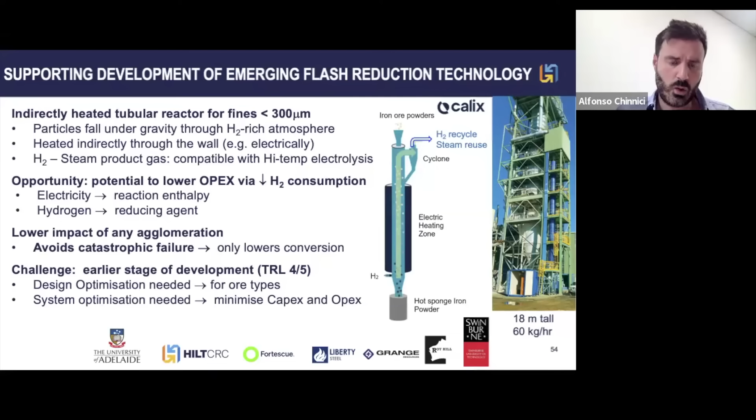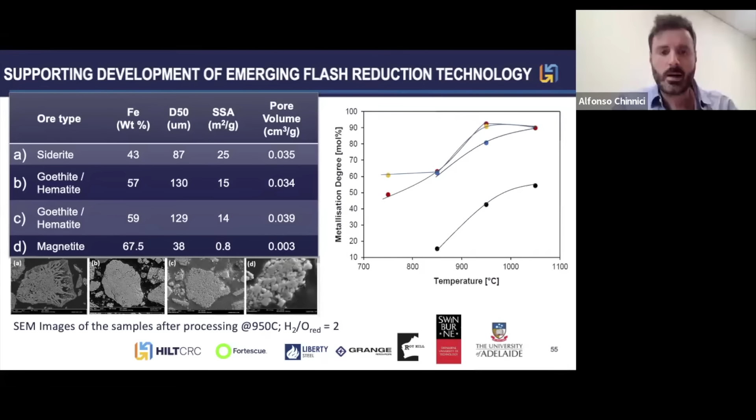Now, we work very closely with them, not just on the demonstration aspect, but also on how we can further improve the understanding of the technology, which is at a lower TRL compared to more established ways of doing reduction today, mostly shaft furnace, but also fluidized bed type. Together with them, the Calix team has demonstrated a lot of benefit in using this novel chemi-reactor drop tube type technology for iron reduction. On average, they were able to show that they can achieve really high metallization degree from different types of ore, but also potentially reduce the temperature at which reductions happen. This could potentially bring a lot of benefit in terms of energy requirement for the DRI step.

Our role in that, of course, in supporting them in pilot scale demonstration, was also in trying to further the understanding of the fundamentals of the process. We have tackled that in three ways: one, through basically a traditional process approach; second and third being advanced CFD machine learning, which I will show you shortly, and also laser diagnostic.

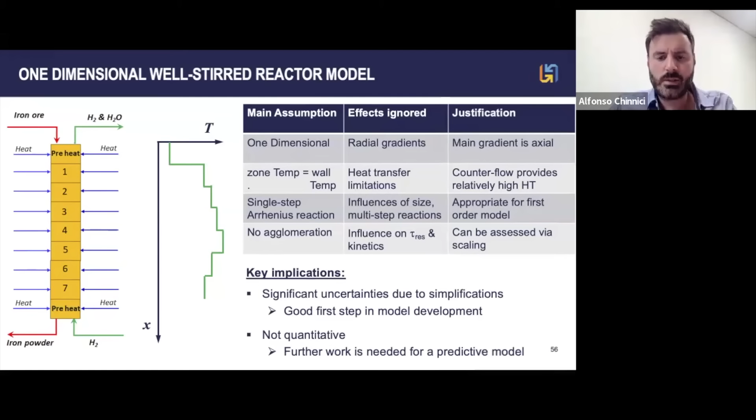From the process point of view, we basically reimagined this drop tube as a series of perfect stirred reactors, so we divided the reactor into a couple of zones. Again, the powder comes from the top, the hydrogen is injected from the bottom, and here you see the different temperature gradients you can achieve by preserving the energy that comes from the electrical heater through the wall.

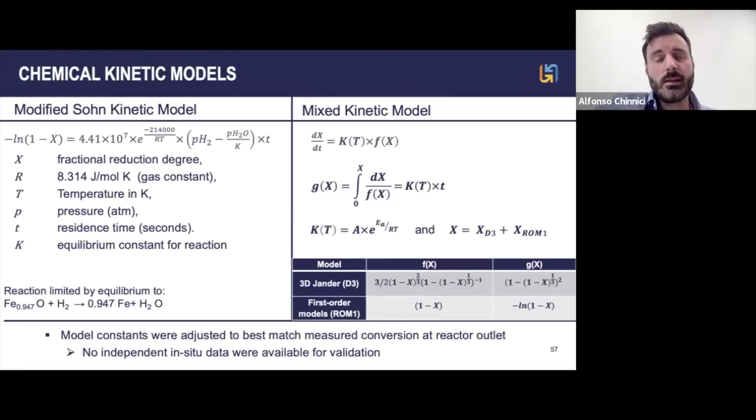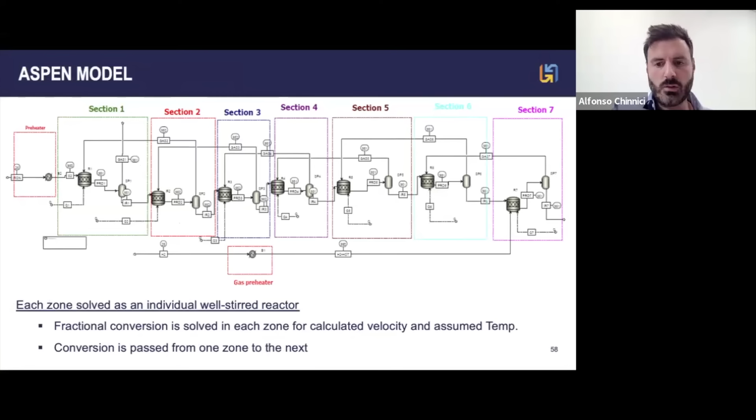We have identified a series of kinetic models. We tested the most established kinetic model for iron ore reduction, which comes from literature. We have done some fine-tuning in-house because, of course, all of these models were developed for lab scale and also for slightly different conditions compared to the drop tube from the Calix team. Here you see a snapshot of the Aspen model that is able to tell us two things: the fractional conversion in each zone, and also the total conversion to DRI.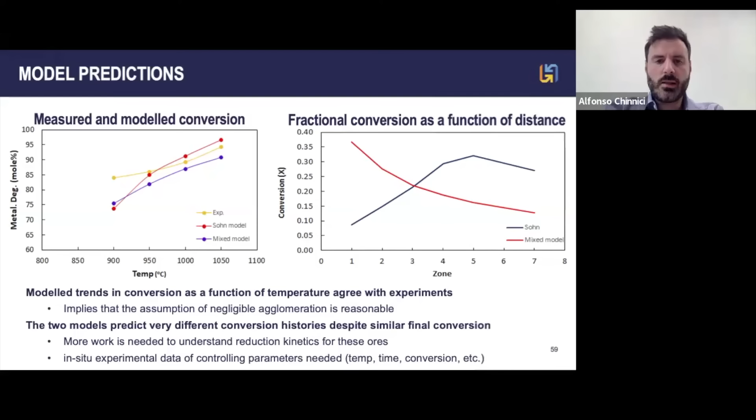From a combustion community point of view, this means there is more work required for us to better understand the reduction kinetics for iron, but we also need to provide better understanding through in situ experimental data of controlling parameters, including residence time, temperature, and conversion. So we have tried, or we are trying to do that in different ways. As you know, our team is very strong in laser diagnostics.

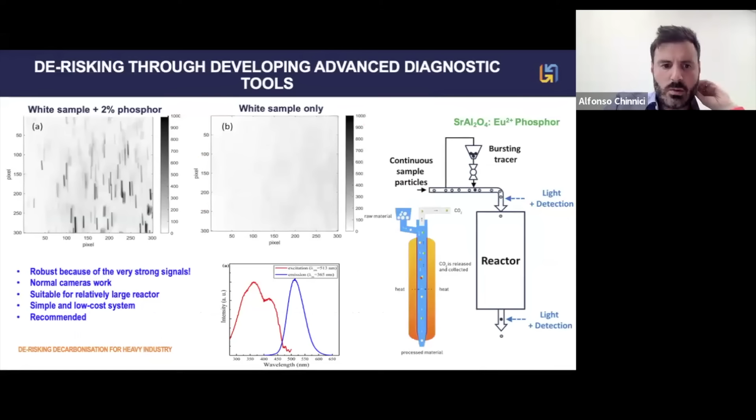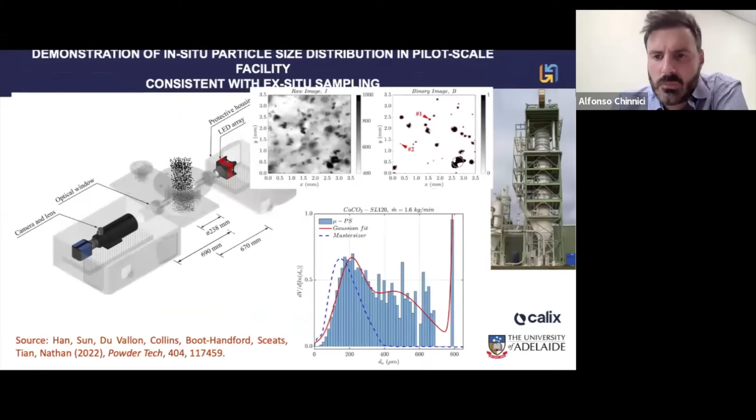This is work led by my colleague Ziwei Sun, and we have basically developed novel optical diagnostic methods. They are relatively cheap and simple to develop for our partners, but able to provide more in situ understanding of potential for agglomeration and also in situ particle velocity.

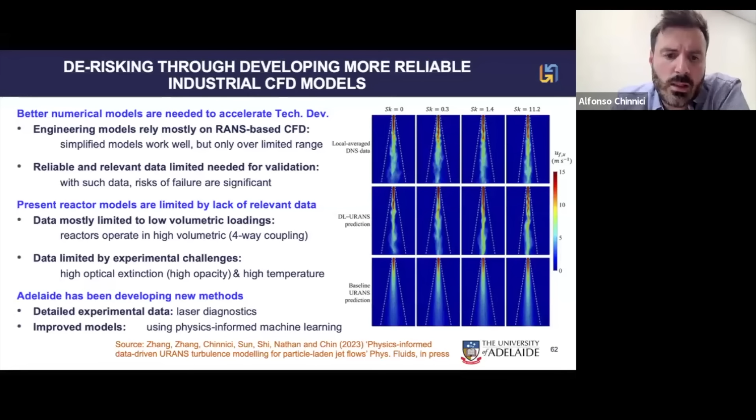We are also pretty focused on improving model prediction for particle dispersion from low fidelity URANS, and we are doing that through basically using physically informed deep learning coupled in our CFD.

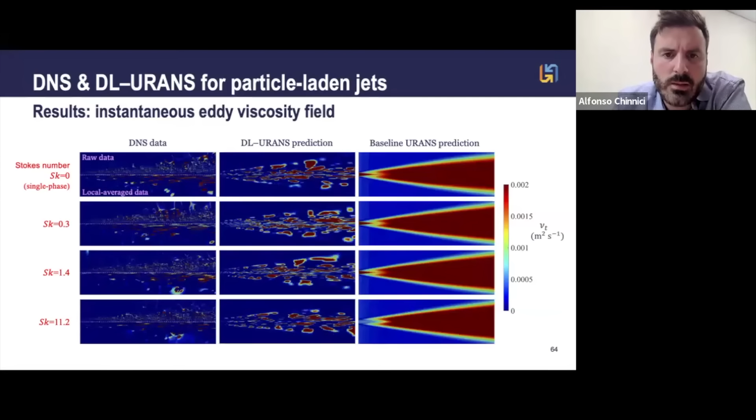I will skip through some of the complexity of the DL-CFD framework, but there is a reference in the paper. Basically, on average, with only a slight increase of about 1.2 times the time needed for baseline URANS through coupling with deep learning from physically informed analysis, we are able to improve most of the parameters coming from URANS prediction, including eddy viscosity fields, fluid velocity fields, and of course particle dispersion and particle velocity fields.

So happy to maybe chat offline on this if somebody is more interested in the detail.

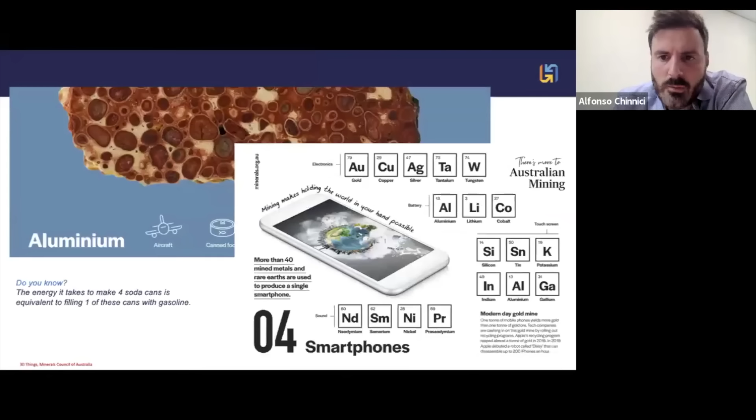Of course, we are very strong in alumina, and aluminium is all around us, in our iPhones, everywhere. So aluminium will stay with us for quite some time. It's a critical mineral for panel and wind turbine production.

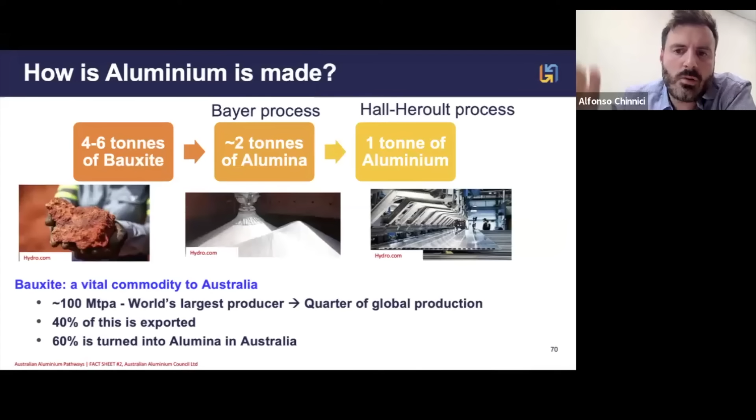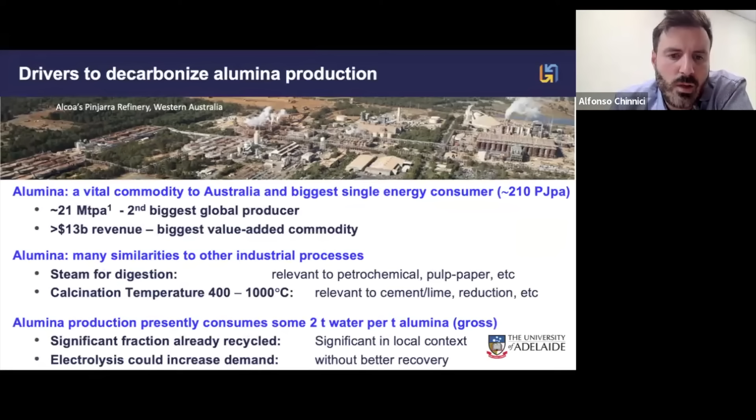And again, in Europe, the focus is more on aluminium. Australia is the second biggest producer of alumina, which is the precursor for aluminium, and also is by far the biggest emitter of CO2 for us, because you're looking at roughly 200 petajoules of energy from only 6 refineries for alumina in Australia. So here we believe that especially for calcination combustion, it will play a big role.

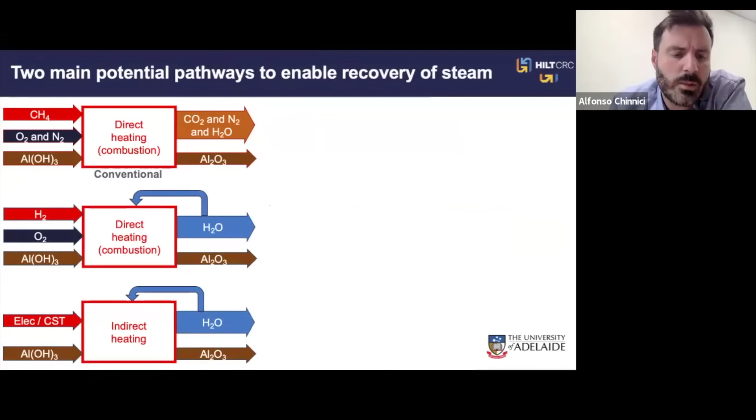Especially if we transition to hydrogen and oxy-hydrogen environments. And having hydrogen in the mix will not only impact the combustion performance, but actually the alumina calcination process. And we believe that through the use of steam enrichment, we are able to show that we can also...

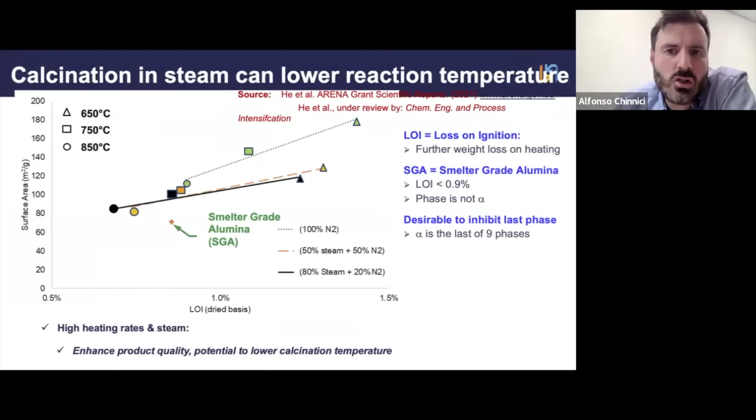Improve the quality of smelter grade alumina while reducing overall the calcination temperature. And again, this has a strong impact on the energy requirement, but also on the quality of what we can produce with the alumina refining of tomorrow.

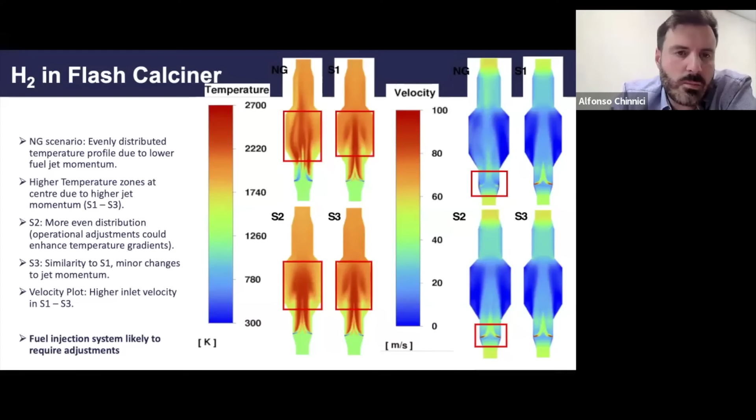But of course, we do need to retrofit or re-engineer our flash calciner or CFB. We have a couple of PhD students working on the impact of hydrogen from a combustion perspective on both flash calciners and modeling of circulating fluidized beds for alumina.

So as a final remark, and sorry, I was a little bit long, but we believe that combustion science is still critical to many of the established and emerging technology pathways to accelerate the decarbonization of heavy industry, and not just decarbonization, but also transformation.

Some of the skills that we learn or have from our more traditional combustion community are directly and also indirectly applicable for development of these novel reactors. CFD, machine learning, laser-based diagnostics, to me, are still quite critical to unlocking the fundamental understanding needed for de-risking upscaling.